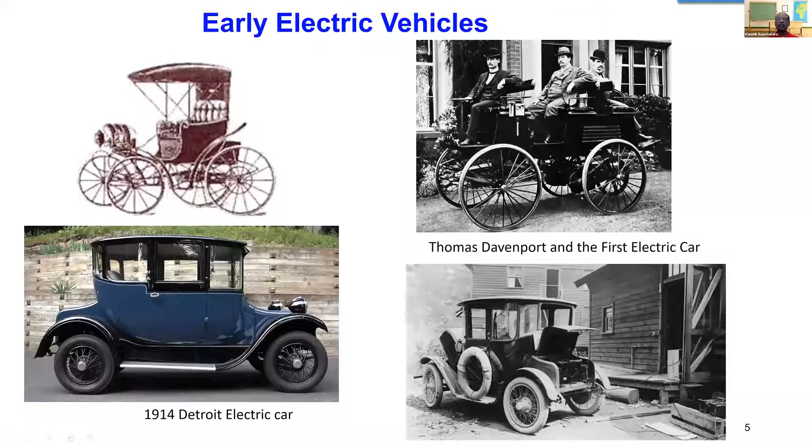So why did the electric vehicles disappear after the 1920s? Because they were expensive. The gasoline-powered car, that is the Ford Model T, was selling at $260 in 1925. The gasoline vehicles became less and less expensive - in 1909, $850, but in 1925, it became $260. But the electric vehicles were quite expensive.

And the other reason is rural areas had very limited access to electricity to recharge the batteries, whereas you can fill in your gas tank at any place. And the next item is emissions.

So why did electric vehicles again come into operation? Why did they resurge? That is because the resurgence of EVs in the 1960s was mainly due to emissions.

The Clean Air Act was enacted in 1970, and Congress introduced bills recommending the use of EVs as a means of reducing air pollution. So from the 1920s to the 1960s, there were no electric vehicles for commercial purpose. There were, of course, always some demonstration vehicles, but not commercially available.

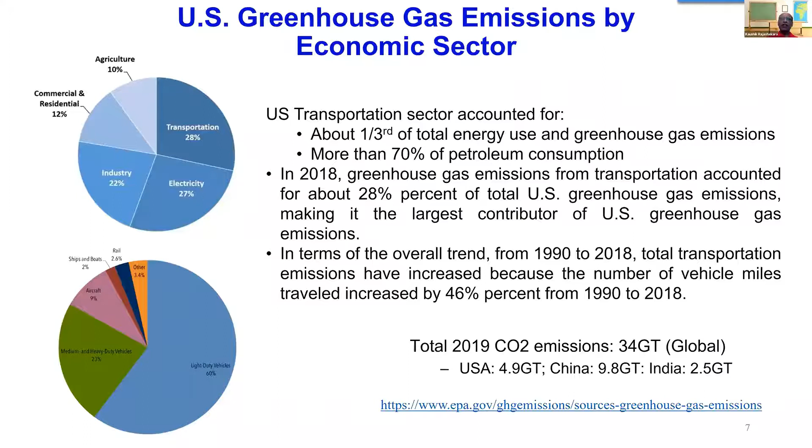So electric vehicles became more and more popular gradually, but were not commercially available till the 1990s. I will come to that explanation.

Before that, I want to tell you what an electric vehicle is. An electric vehicle is just like any other vehicle. Instead of the internal combustion engine, propulsion is provided by the electric motor. The electric motor gets its power from the battery, and generally all the motors used by automotive manufacturers are AC motors.

But the battery power is DC, so DC has to be converted into AC. There is an inverter. The inverter converts DC to AC of variable frequency and variable voltage, which is what the motor requires to run at different speeds and give different power. So we have the battery, an inverter which converts DC to AC, and the motor which provides propulsion power. And there is a converter.

This converter is used for boosting the battery voltage to a higher voltage. The recent trend is to use higher voltage at the inverter input so you can reduce the current requirement, and so the cable sizes can be lower. But the battery is at a lower voltage, so it has to be boosted. This acts as a boost converter to the required voltage for the inverter.

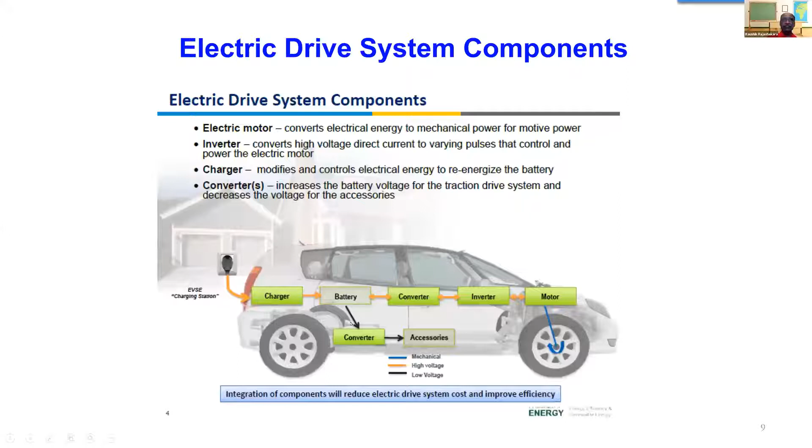Coming back to the commercial aspect of electric vehicles: the GM Impact was, I would say, a prototype version of the GM EV1. The technology developed for the GM Impact was used for the GM EV1. The GM EV1 was the first commercially available electric vehicle, from 1996 to 1999.

The Impact prototype used induction motors. There were 2 induction motors at the front wheels, hence there were 2 inverters. At the time, we were using MOSFETs—this was my first project when I joined General Motors to work on this system. We worked with AeroVironment for development of this vehicle. At that time, as I said, there were no IGBTs, so MOSFETs were used: 24 MOSFETs connected in parallel, and there were 2 inverters because there were 2 motors.

The battery was a lead acid battery, weighing about 395 kilograms, more than 1/3 the weight of the total vehicle. The range of this vehicle was listed as 120 miles, but I would say about 80 miles in actual cases. And you could recharge in 2 hours.

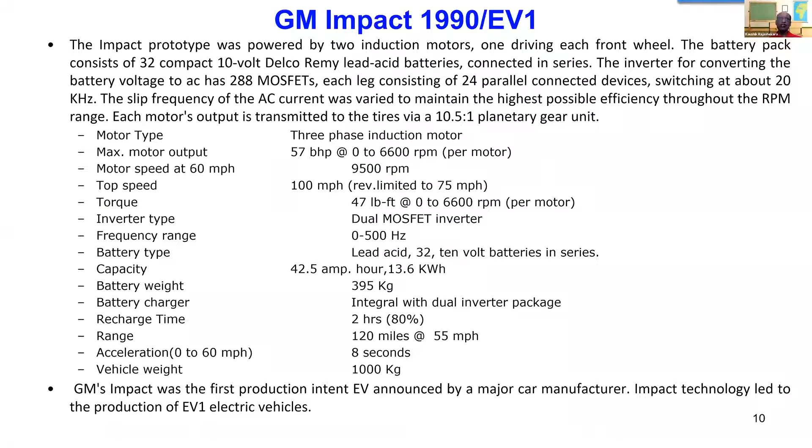So this is the GM EV1, developed and on lease from General Motors from 1996 to 1999. This was a very good electric vehicle and performance was good. The only thing is the range was not as high as expected, about 80 to 90 miles. And it was expensive, so many people could not buy it or lease it.

And everything was electric here: electrically heated windshield, the heating was electric, and braking was electric. Everything was more or less electric.

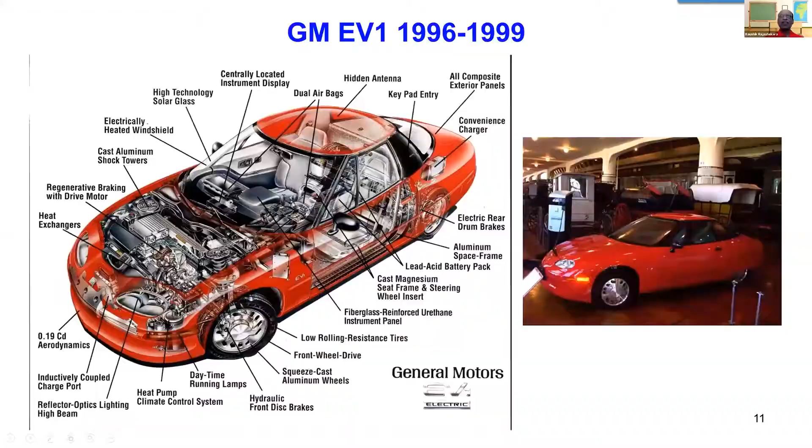In 1997 the Toyota Prius came. This was a hybrid vehicle giving a much higher range and also higher equivalent miles per gallon than the GM EV1 electric vehicle. It was also less expensive, so people didn't have to worry about the range of the vehicle. It is like a regular gasoline vehicle, and whenever you need to fill up, you can go to a gas station and fill it up.

So gradually the use of electric vehicles declined after 1997, until Tesla came out with the Tesla Roadster in 2008. It was an expensive vehicle, a pure electric vehicle, but it had very good performance. It was like a luxury electric vehicle.

And they were the first to use lithium ion batteries. At the time, no modules were available, so they took laptop batteries and connected them in series and parallel to achieve the required voltage and kilowatt hours. The cost of this was about $100,000, and several people bought it because it was a very nice car, and it was like a status symbol at the time to have this Tesla Roadster.

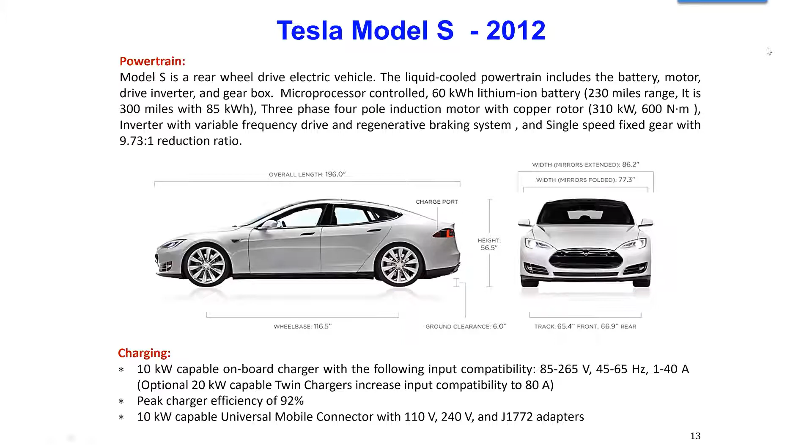Now there are a lot of electric vehicles: Nissan Leaf, Tesla Model S, Kia Soul, and every automotive manufacturer is now more or less producing electric vehicles. For example, the Nissan Leaf is another famous electric vehicle. It has a range of 107 miles, is less expensive than Tesla vehicles, and has a battery energy of 30 kilowatt hours.

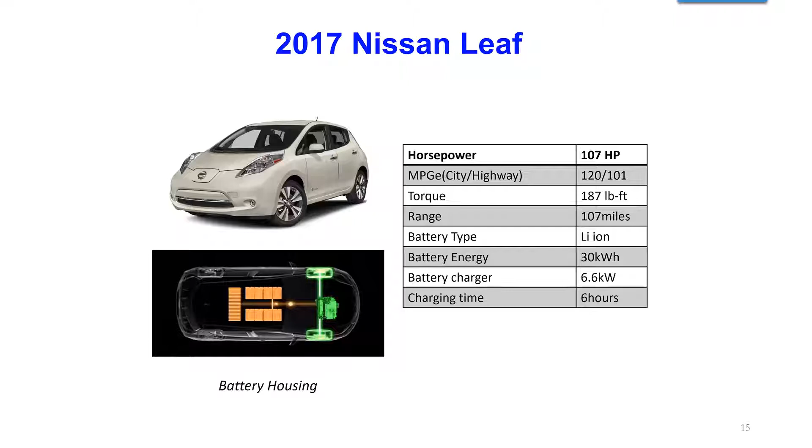Now, almost all electric vehicle manufacturers use lithium ion batteries. This is the range again, 107 miles.

Now let us look at hybrid vehicles. What is the difference between an electric vehicle and a hybrid vehicle? In a hybrid vehicle, you have an internal combustion engine and also an electric motor. Depending on whether it's a series hybrid or parallel hybrid, the internal combustion engine plays a different role.

In a series hybrid vehicle, the propulsion aspect looks exactly similar to a pure electric vehicle: battery, inverter, and motor. So 100% of the propulsion is provided by the electric motor. But there is also an engine and a generator. The engine drives the generator, and whenever the battery state of charge falls below a certain level, the engine turns on, drives the generator, and charges the battery. So battery state of charge can be maintained at a certain level by this series hybrid configuration.

In a parallel hybrid vehicle, there is an internal combustion engine and also an electric motor, and both can provide propulsion at the same time. The engine can also drive the vehicle, and the motor power can be combined with the engine power to provide propulsion power. Since both are combined together, it is called parallel hybrid.

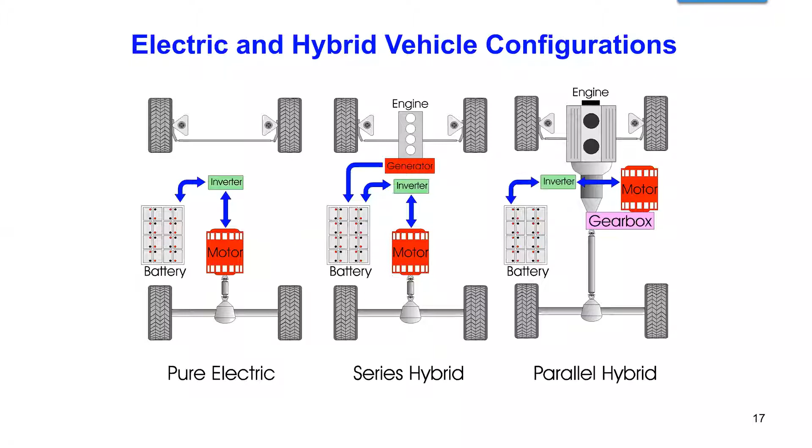There is also a plug-in hybrid vehicle. A plug-in hybrid vehicle is slightly different from the hybrid vehicle, in that it can be recharged at home during night time or at the workplace.

Otherwise, it is similar to the other hybrid electric vehicle. You can see here both are similar, except the battery can be charged at night or whenever it is parked. Also, the size of the battery is bigger than the regular hybrid vehicles. In hybrid vehicles, the battery is charged while the vehicle is running. In plug-in hybrid vehicle, the battery can be charged when the vehicle is running and also when it is parked.

So this is the electric vehicle. There is slight similarity between the electric vehicle and PHEV, and also a lot of similarity between the HEV and PHEV.

There are other types of hybrid vehicles also, called micro hybrid, mild hybrid, full hybrid. They are all parallel configurations. In series hybrid vehicle, there is another type called the range extender in addition to the full series hybrid vehicle.

In a parallel hybrid vehicle, for example, you see this diagram. As it goes from micro hybrid to full hybrid, the size of the engine decreases, but the size of the electric motor increases, and the size of the battery also increases. If the size of the electric motor is less, the battery size is also less.

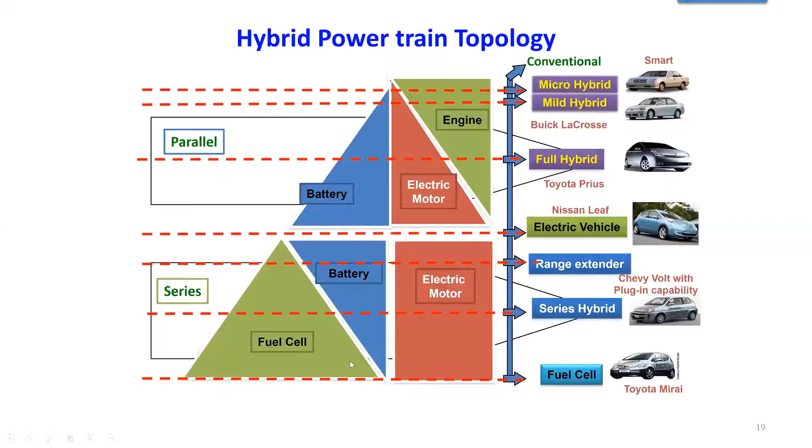So if you look at the degree of hybridization, micro hybrid does only start-stop function. Mild hybrid can do, in addition to start-stop, regenerative braking and also assist the internal combustion engine during acceleration and passing a vehicle. A full hybrid can be used for driving as a pure electric vehicle also. And a plug-in hybrid vehicle can be recharged from the wall outlet when it is parked. Micro hybrid can give 5 to 10% improvement in fuel economy,

but the motor needs are 3 kilowatt to 5 kilowatt. Mild hybrid reduces the fuel consumption by about 7 to 15%. The motor power is 10 to 15 kilowatt. Full hybrid fuel economy is more than 30%, but the electric motor is more than 20 kilowatt.

And plug-in hybrid, which can be driven as a pure electric vehicle for a certain time, can provide fuel economy of greater than 50% and also lower emissions. The power levels are also greater than 20 kilowatt on average, and it also needs a bigger battery when compared to the regular hybrid vehicle.

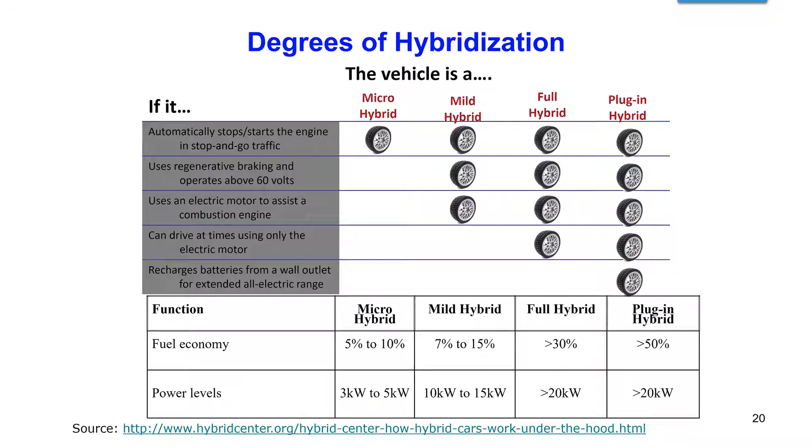So now briefly look at the micro and mild hybrids. As I said earlier, for the micro hybrid, you replace the alternator in the existing internal combustion engine vehicles with an integrated starter generator. This is actually a belt-driven integrated starter generator system, so the generator is driven with a belt. You take the generator and make it a motor and a generator, so you need an inverter to make that electric machine work as a motor.

The integrated starter generator, or integrated starter alternator, does not have a large starter alternator external to the powertrain, so it can transmit more power since it is not limited by the belt drive. The motor is mounted between the transmission and the engine. This is where the motor is mounted here. This is the integrated starter generator.

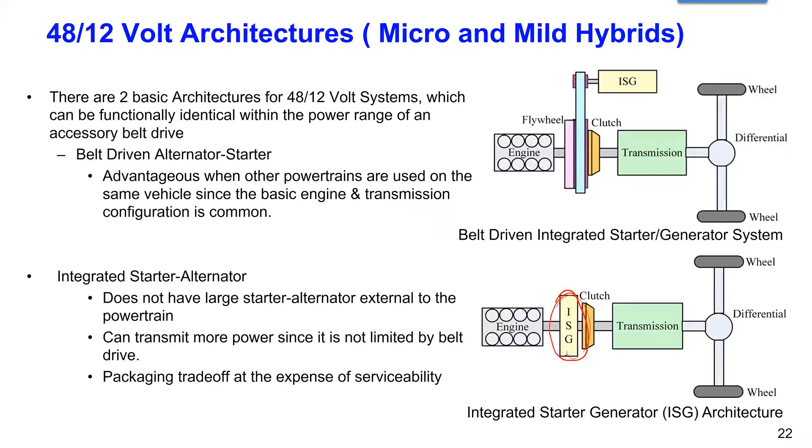In a series hybrid vehicle, the power to the propulsion motor goes from the engine driving the generator, through a rectifier, then to the motor controller which has the inverter, gate drives, controllers, everything, and the motor. Power also comes from the batteries. When the power required by the motor is not that high, the engine can charge the batteries, and the engine driving the generator can also provide the propulsion power directly. That is the series hybrid vehicle.

It needs two electric machines, a generator and an electric motor, an engine, and a rectifier, etc. The generator is usually sized for the continuous power of the vehicle, and the motor is sized for the peak power of the vehicle.

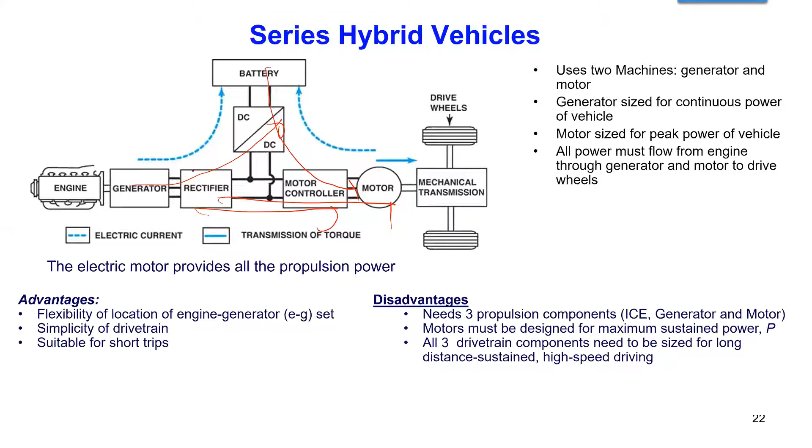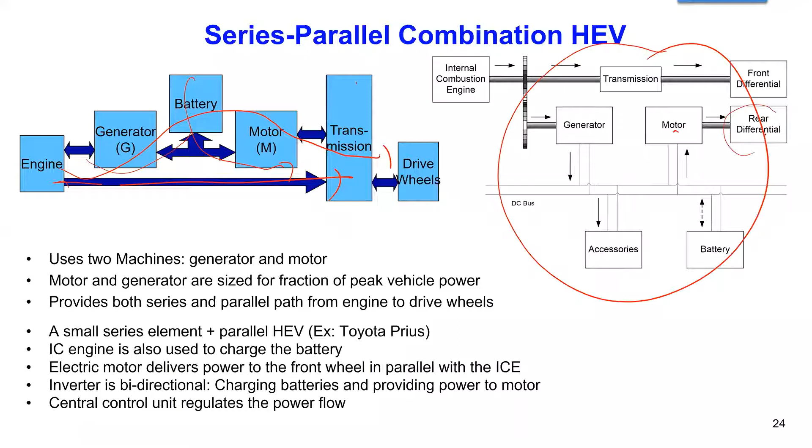This shows the complete architecture of the system. It is also possible that the electric motor drives the rear wheels, and the front wheels are driven by the internal combustion engine directly. This is the Toyota hybrid system. Toyota uses this architecture in almost all their hybrid vehicles.

The power from the engine, the power coming from the battery, and the generator power are all combined into one system here. That is the planetary gear system, or hybrid system, as they call it. And the power goes to the wheels.

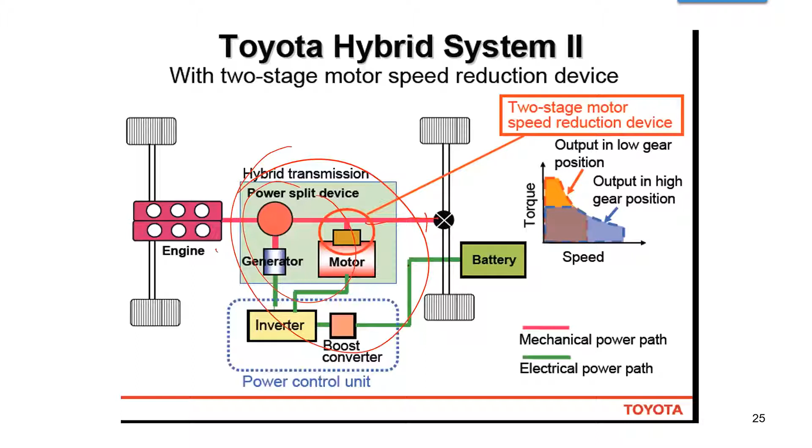The Toyota Prius operates like this: when starting or moving under very low loads, it starts using the electric motor and provides the propulsion power. The differential is here.

Under normal driving, where is the power coming from? The power is coming from the engine driving the generator. The power is coming from here, and also directly from the engine. The engine also drives the generator and charges the battery.

Depending on whether the power is needed by the motor or engine, it is possible that the power also comes from here. Or it is also possible that the power directly goes through without even charging the batteries, depending on how much power is required.

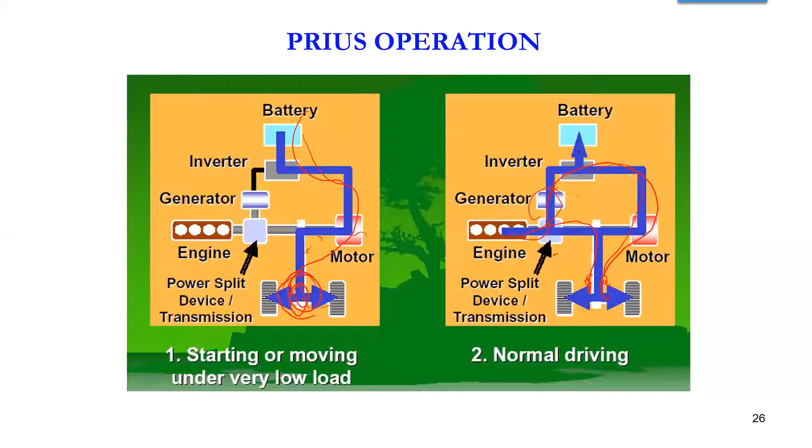On full throttle conditions, where maximum power is needed, the power comes from both the internal combustion engine and the battery. All the power goes to the propulsion system.

Under normal deceleration or braking conditions, this motor acts as a generator and recharges the battery.

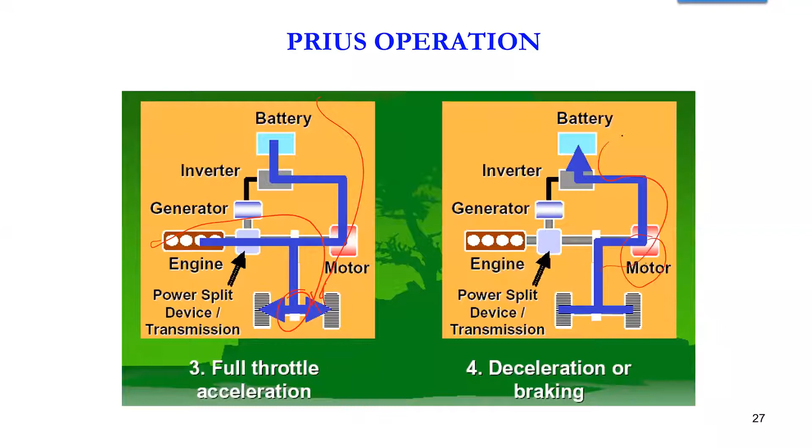This is a plug-in hybrid vehicle. A plug-in hybrid vehicle, as mentioned earlier, can be charged whenever the vehicle is parked in the garage or at the workplace, and you can go certain miles as a pure electric vehicle. For example, the Prius Prime can go about 28 miles. Then if you go for a long distance, the battery starts depleting, and at that time you can turn on the engine and it charges the battery.

You can maintain the state of charge of the battery at a certain level by turning the engine on and off.

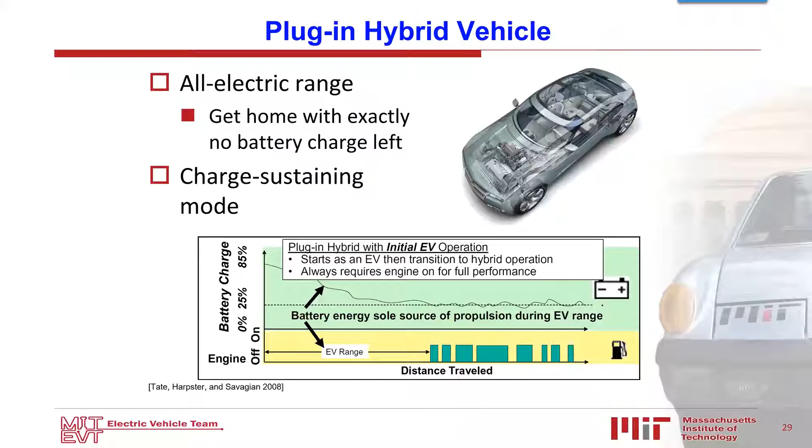This Chevy Volt plug-in hybrid vehicle is no longer available, it is discontinued. It was a most famous plug-in hybrid vehicle, giving 106 miles per gallon equivalent, with a pure electric range of 53 miles. As long as you drive less than 53 miles per day, you never have to fill in gasoline. Combined electric and gasoline range was 420 miles, using lithium-ion batteries. It was discontinued not because of technology problems, but because it was slightly expensive and General Motors could not sell as many as they wanted to.

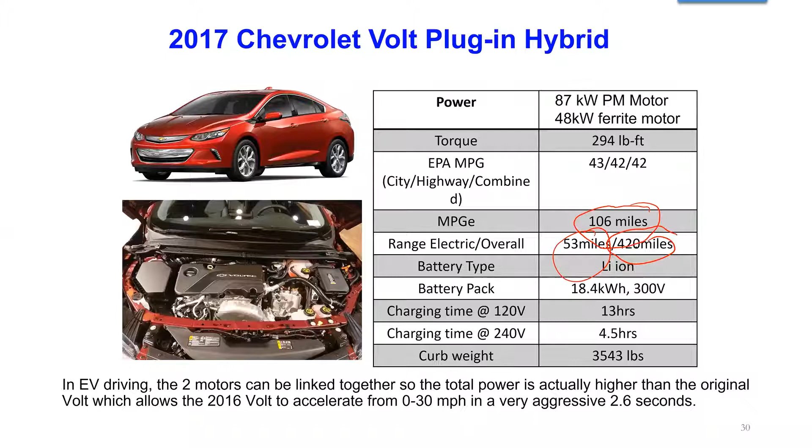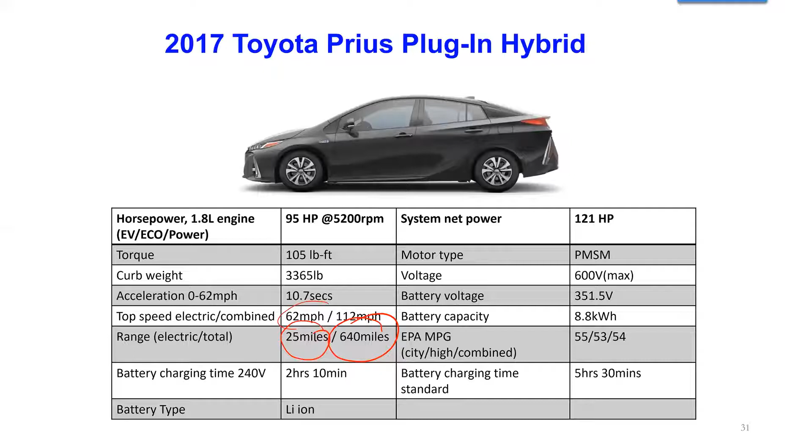The Toyota Prius plug-in hybrid, or Prius Prime, is also available. The 2017 model has 25 miles of electric vehicle range, and I think the recent one has 28 miles. With a full tank of gasoline and fully charged battery, you can go 640 miles total. The recent 2020 Mitsubishi Outlander plug-in hybrid vehicle has a range of 310 miles. This is a bigger vehicle, and its pure electric vehicle range is 22 miles.

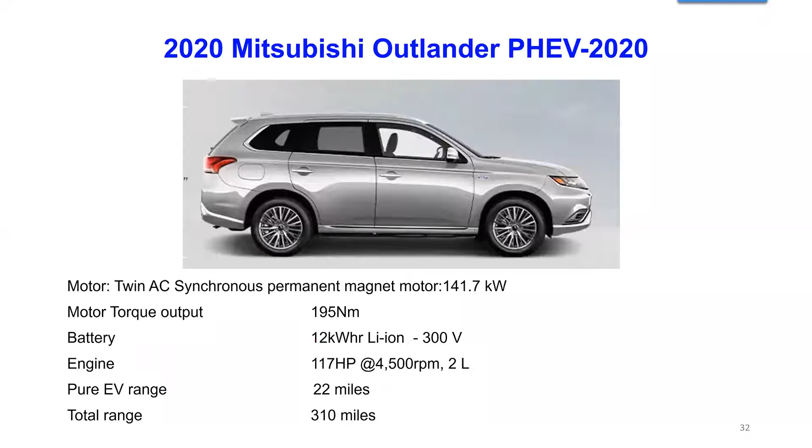The Toyota Mirai fuel cell vehicle is also available. In addition to electric and hybrid vehicles, a few other companies are also making fuel cell vehicles, like Toyota, Hyundai, and Honda. They're all working on fuel cell vehicles. The 2021 Toyota Mirai fuel cell is quite expensive, with a range of 650 kilometers and 5.6 kilograms of hydrogen. One gallon of gasoline has the same amount of energy as one kilogram of hydrogen. Burning one gallon of gasoline produces 19 pounds of carbon dioxide, whereas burning one kilogram of hydrogen produces no emissions.

The lithium-ion battery being used is 310 volts, and it has a range of 404 miles.

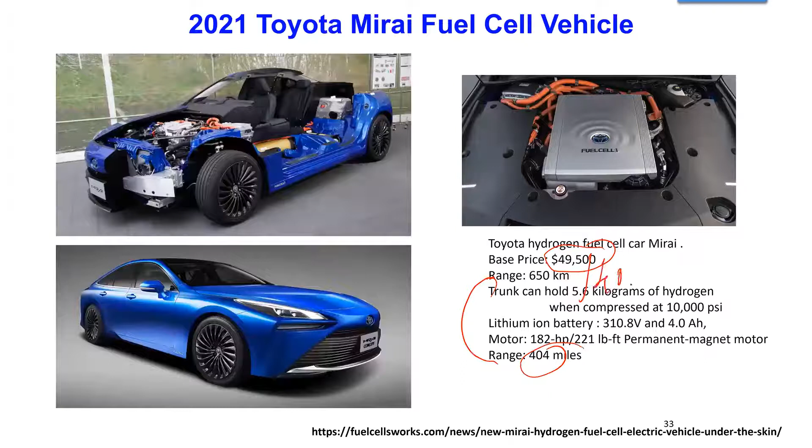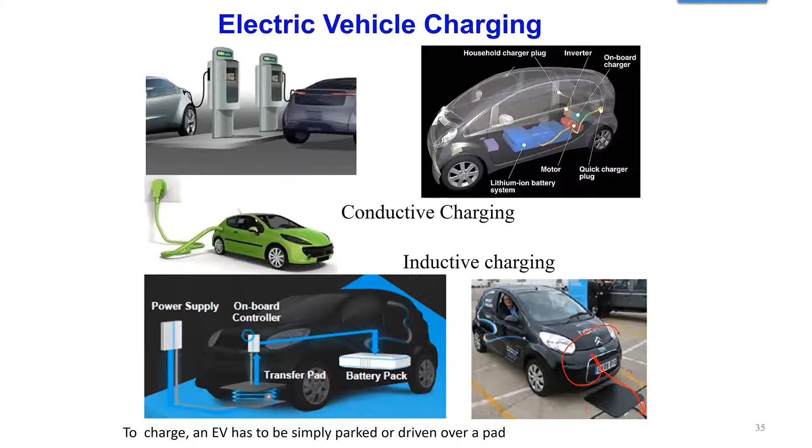Now for electric vehicle charging, there are two types: conductive charging and inductive charging, or wireless charging. Conductive charging is where you take the charger and connect it to the wall outlet, and then it is charged. Inductive charging is where you just drive the vehicle up to a certain point, there's a pad here, and then you stop there and it automatically charges. You don't have to do anything, you don't have to get down and connect the plug to the wall outlet.

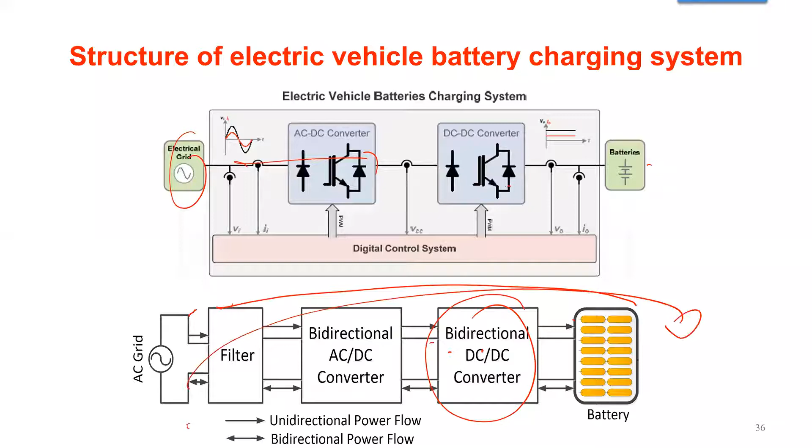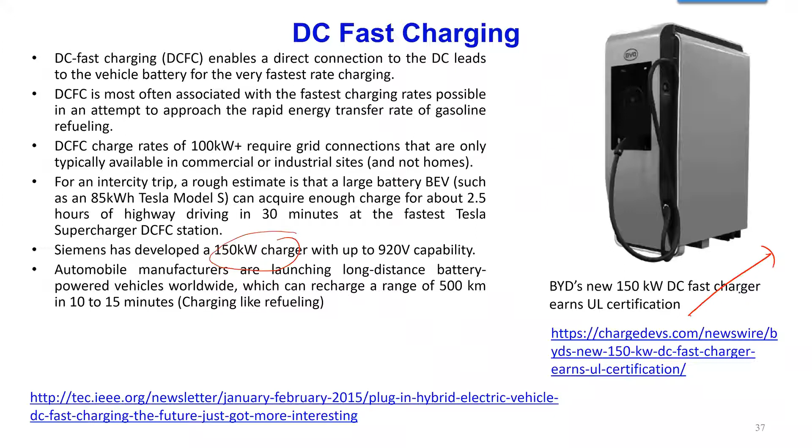Fast charging systems are available now. They have been available for some time, but it's still recent. Tesla has a number of super fast charging stations, there is a 150 kilowatt charger by Siemens available, and BYD, the Chinese company, has a new 150 kilowatt DC fast charger with UL certification, that is the Underwriter Labs in the United States.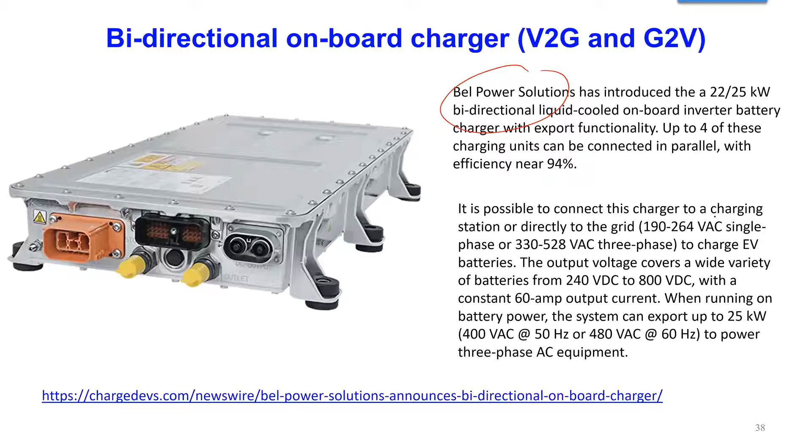This is the bi-directional onboard charger from the company Bel Power. It can be connected to 240 volts AC or 400 volts AC three-phase system, allowing bi-directional operation.

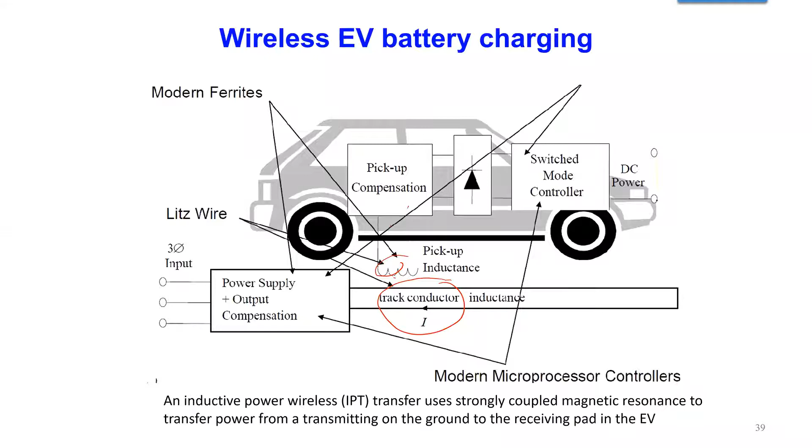This is the architecture for wireless EV battery charging. There is a three-phase AC, and this is like the primary of the transformer. The secondary is here, it picks up power, then the AC is rectified, and there is a DC-DC converter that charges the batteries. So what are the challenges?

Challenges for electric vehicles, or electric motors: right now, almost all automotive manufacturers are using permanent magnet motors. But permanent magnet motors are expensive, and at higher temperatures they may demagnetize, and there is a fault tolerance problem, but they are still very high in efficiency and power density. That's why all automotive manufacturers are still using PM motors. But over the long run, it's possible we may move to electric motors like synchronous reluctance motors with no permanent magnets, though you can add a slight permanent magnet to make it better.

Induction motor was the one that was used in early electric vehicles.

Power electronics still has some challenges, even though it has advanced a lot: the packaging, the EMI aspects, and also reducing the cooling system.

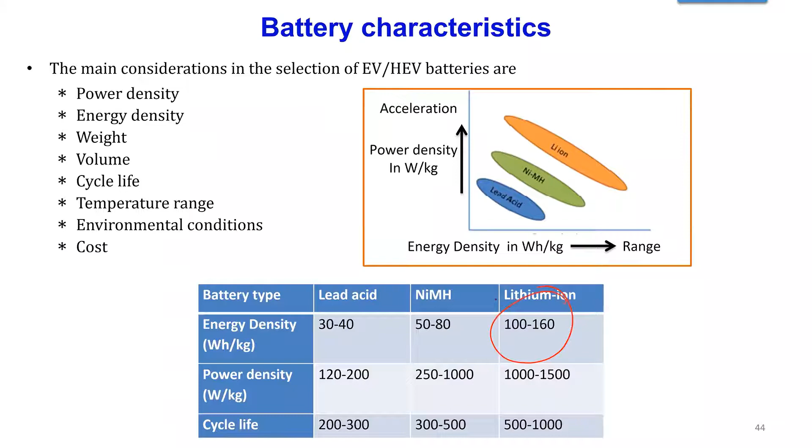There are several types of lithium-ion batteries, but most commonly used ones are lithium-ion cobalt, lithium-ion manganese, and lithium-ion phosphate. There is a tendency to go for different types of batteries because the lithium-ion batteries use liquid or polymer electrolyte, and that has led to some safety concerns.

Using a solid-state battery makes it more safer. They work in the same way as current batteries do, but the change in materials alters some battery attributes, including the storage capacity, charging time, size, and safety. So they are lightweight, smaller, higher capacity, and cheaper than current liquid-based lithium-ion batteries.

Several companies are working on this type of technology. Another technology, which is long-term, is lithium air batteries, also being looked upon by a few companies, that has a much higher energy density than any of the other batteries. But that will be a long time to go.

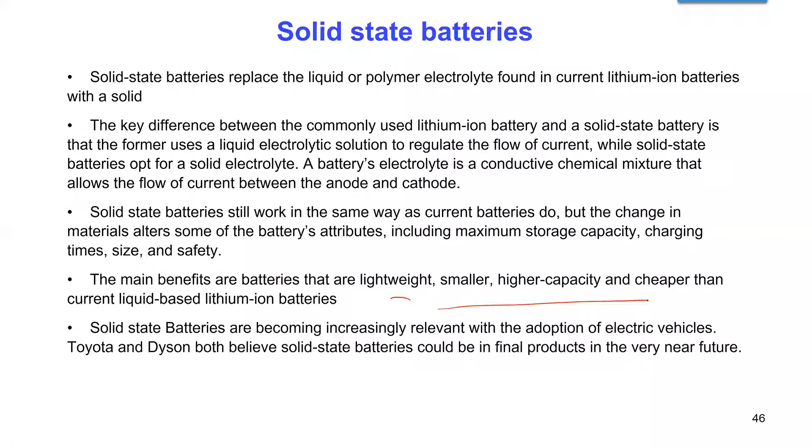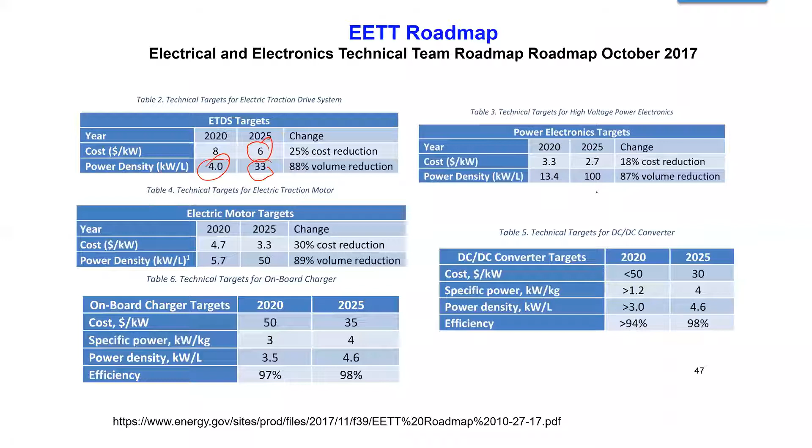The electrical and electronic technical team roadmap provided by the Department of Energy has a target for the electric traction drive system by 2025 of $6 per kilowatt and power density of 33 kilowatt per liter. Right now, by 2020, it is only 4, so they want 88% volume reduction. The electric motor power density has to be increased, or volume reduction has to be done, by 89%. Efficiency has to go to 98%, and power electronics cost has to be $2.7 per kilowatt. So a lot of challenges there, even for DC-DC converters.

So what is the trend? The future will be more on silicon carbide based vehicles, because we went from MOSFET to IGBT. Now we are looking at silicon carbide MOSFET based vehicles, then advanced high density packaging operating at a junction of 250 degrees Celsius.

And the motors, as I mentioned earlier, the manufacturers were using induction motors. Then right now everybody is using PM motors. The future could be synchronous reluctance motors.

Presently there are no standards for battery voltage. Everybody uses different voltages for the battery. I think there has to be some standard for these battery voltages. And regarding the battery itself, now it is lithium ion, but in future it could be solid state, and in the long term, lithium air. And more, it will be wireless charging.

Renewable energy will also be used for charging. All the vehicles will be able to do V2G, G2V operation, so we can connect the battery of the electric vehicles to the grid and participate as a microgrid or provide power. That will help in reducing the number of new power plants built.